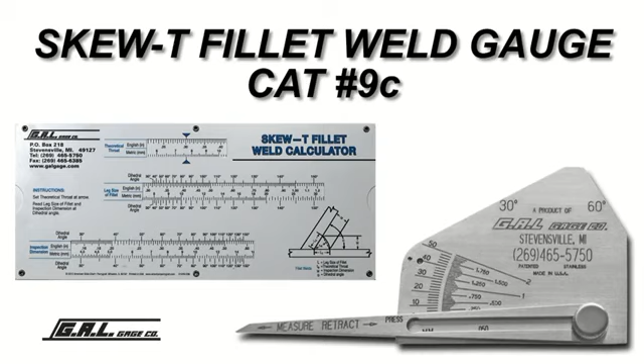The Skew-T Fillet Weld gauge and calculator can be used to check the inspection dimension of an acute and obtuse dihedral angle weldment, as well as the angle of the vertical member.

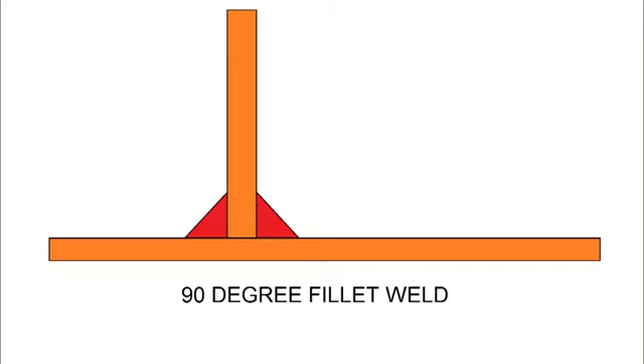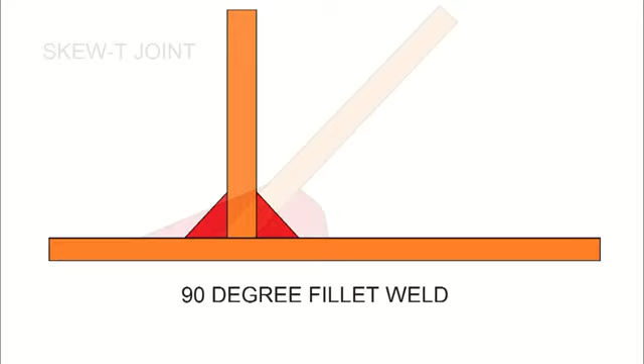Normally, we think of members being welded together at 90 degrees to each other. A special condition exists when members come together and are welded at angles other than 90 degrees, and fillet welds are used to make the connection. These connections are called Skew-T joints. The angles involved usually are at a 30-degree angle minimum on the acute side.

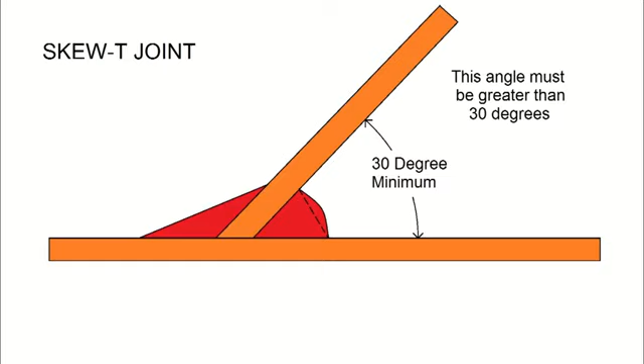In accordance with AWS standards, welds deposited in acute angles less than 30 degrees are not considered as effective in transmitting applied forces. Skew-T welds are usually specified in one of three ways: theoretical throat size, leg size, or the

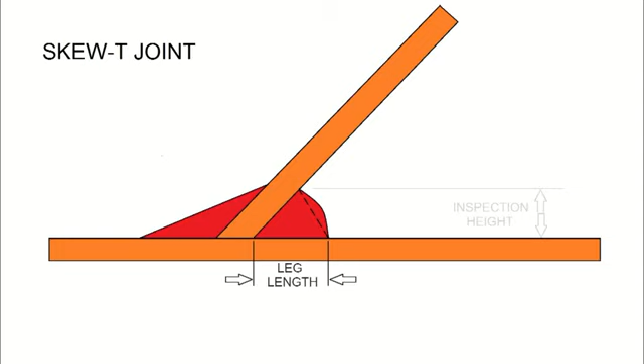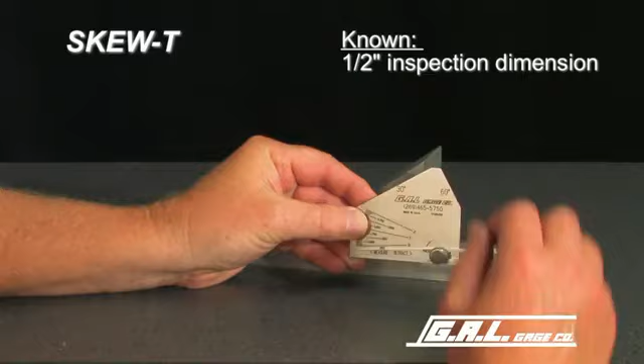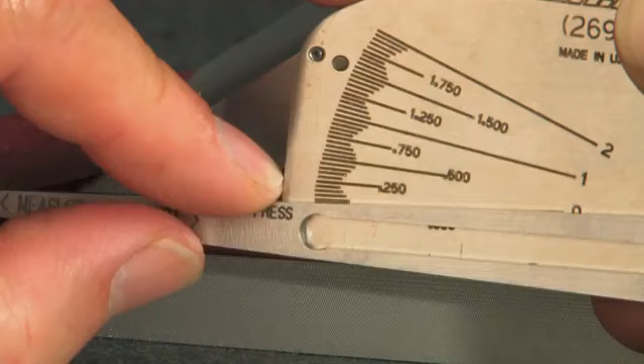inspection dimension is given. If the inspection dimension is given, the Skew-T Fillet Weld gauge can be used directly without any calculations. In this example, a 1/2 inch inspection dimension is specified. To use the gauge, loosen the locking screw, fully extend the pointer, and lightly tighten the locking screw. Using the top edge of the pointer, set the gauge to 500 thousandths of an inch, or 1/2 of 1 inch.

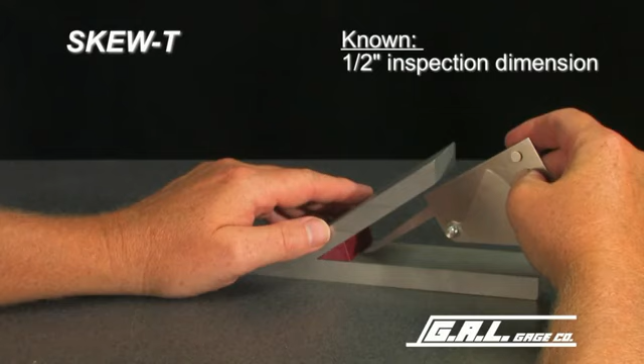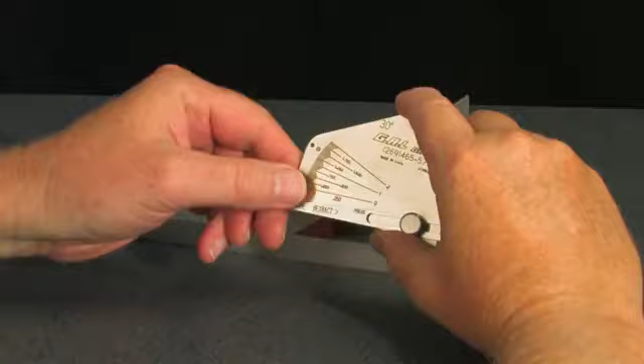Place the gauge onto one of the members on the obtuse angle side and gently slide it up to the toe of the weld. This verifies the 1/2 inch inspection weld size. The gauge can also be used on the angled member. This gauge can also be used on the acute side of the weld, on both members as well. Remember to fully retract the pointer and set the lock screw to protect the end of the pointer.

If the theoretical throat size is given, the dihedral angle must also be specified, or it can be measured using the Skew-T Fillet Weld gauge. To measure the dihedral angle, place the gauge on one of the members and slide forward until the rotating plate comes in complete contact with the other member. The angle can then be read from this scale. This angle measures 35 degrees.

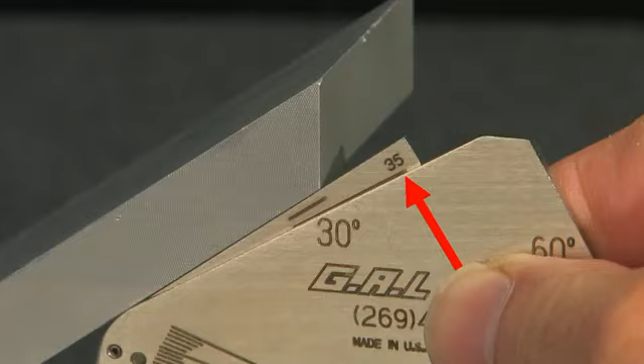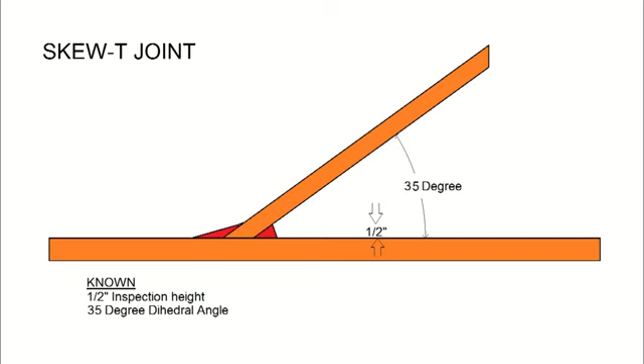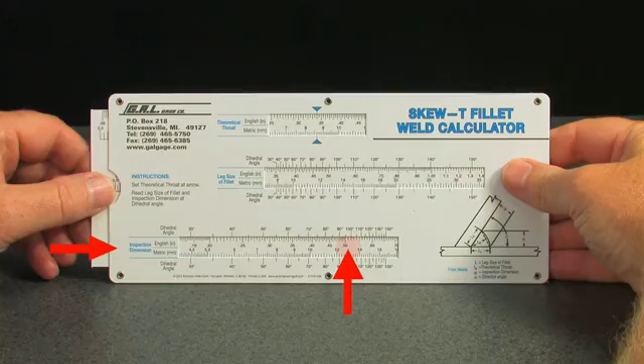With the known 1/2 inch inspection dimension and the verified dihedral angle, we can use the Skew-T Weld calculator to find the theoretical throat size and the leg size of the fillet weld. First, find the 1/2 inch or 500 thousandths inspection dimension on the lowest scale of the calculator. Slide the inside card until the 1/2 inch dimension lines up with the 35-degree dihedral angle.

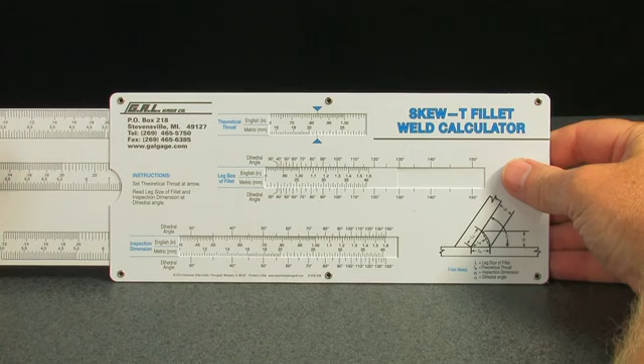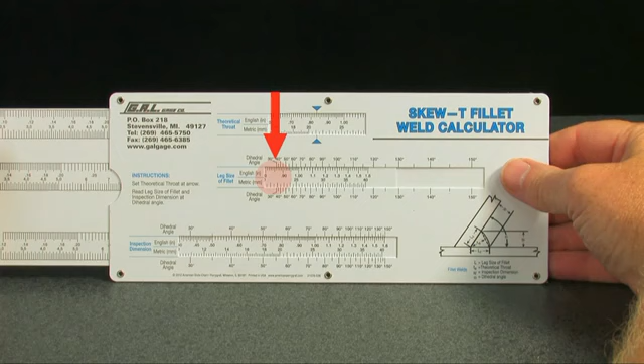Now, look at the theoretical throat scale. It reads just over 830 thousandths. Now look at the leg size scale and find the 35-degree dihedral angle. It reads just over 870 thousandths.

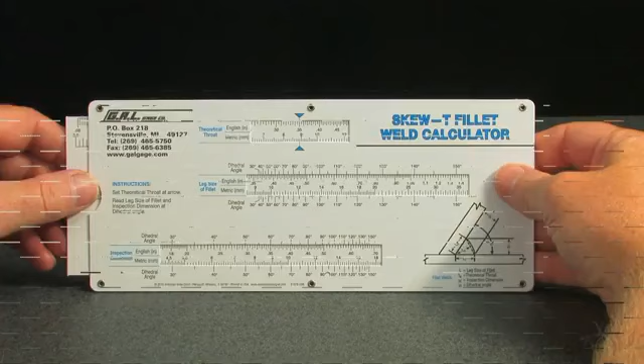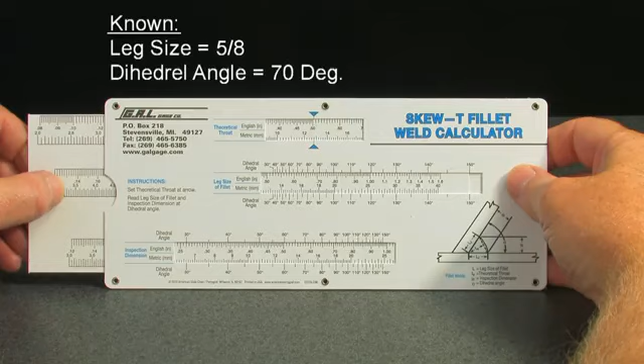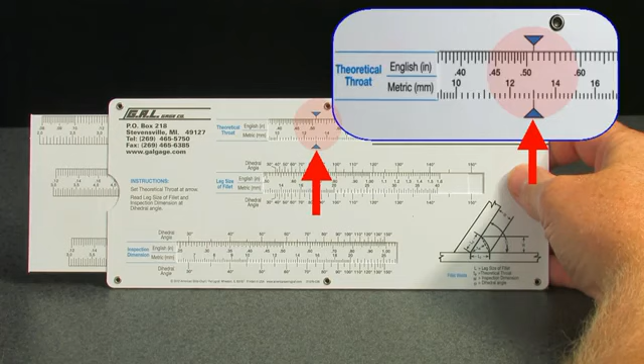Let's say a leg size of 5/8 of an inch, or 625 thousandths, and a dihedral angle of 70 degrees is given. Slide the inside card until the 5/8 dimension lines up with the 70-degree dihedral angle. The calculator shows the theoretical throat size to be just over 510 thousandths of an inch. Find the 70-degree dihedral angle mark on the inspection dimension scale. The inspection dimension reads just under 590 thousandths.